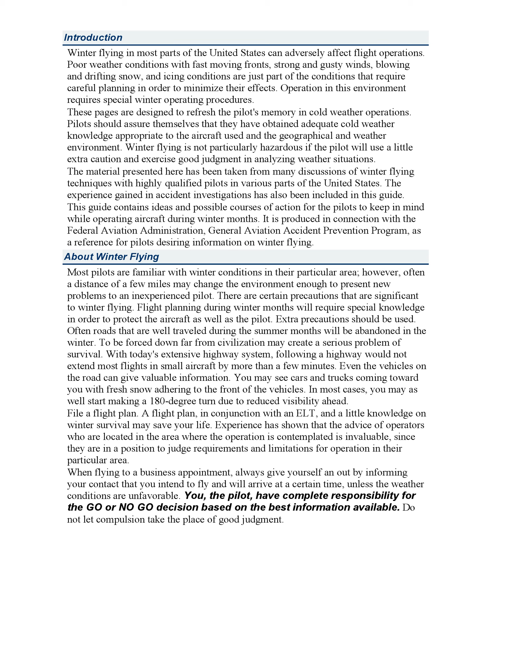Aircraft preparation. If your home base is located in a warm climate area, you may not have familiarized yourself with the aircraft manufacturer's recommendations for winterizing your aircraft. Most mechanical equipment, including aircraft and their components, are designed by manufacturers to operate within certain temperature extremes. Manufacturers generally can predict their product's performance in temperature extremes and outline precautions to be taken to prevent premature failures.

Baffling and winter covers: baffles are recommended by some manufacturers to be used in augmented tubes. Winter fronts and oil cooler covers are also added to some engine installations. FAA approval is required for installation of these unless the aircraft manufacturer has provided the approval. When baffles are installed on aircraft, a cylinder head temperature gauge is recommended, particularly if wide temperature differences are to be encountered.

Engine oil. The oil is extremely important in low temperatures. Check your aircraft manual for proper weight oil to be used in low temperature ranges.

Oil breather. The crankcase breather deserves special consideration in cold weather preparation. A number of engine failures have resulted from a frozen crankcase breather line which caused pressure to build up, sometimes blowing the oil filler cap off or rupturing a case seal, which caused the loss of the oil supply.

The water, which causes the breather line freezing, is a natural byproduct of heating and cooling of engine parts. When the crankcase vapor cools, it condenses in the breather line, subsequently freezing it closed. Special care is recommended during the pre-flight to assure that the breather system is free of ice. If a modification of the system is necessary, be certain that it is an approved change so as to eliminate a possible fire hazard.

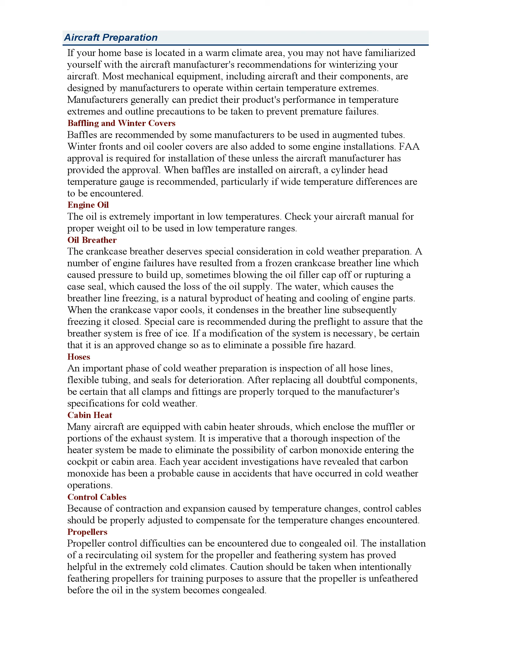Propellers. Propeller control difficulties can be encountered due to congealed oil. The installation of a recirculating oil system for the propeller and feathering system has proved helpful in extremely cold climates. Caution should be taken when intentionally feathering propellers for training purposes to assure that the propeller is unfeathered before the oil in the system becomes congealed.

Batteries. Wet cell batteries require some special consideration during cold weather. It is recommended that they be kept fully charged or removed from the aircraft when parked outside to prevent loss of power caused by cold temperatures and the possibility of freezing.

Wheel wells and wheel pants. During thawing conditions, mud and slush can be thrown into wheel wells during taxiing and takeoff. If frozen during flight, this mud and slush could create landing gear problems. The practice of recycling the gear after a takeoff in this condition should be used as an emergency procedure only. The safest method is to avoid these conditions with retractable gear aircraft. It is recommended that wheel pants installed on fixed gear aircraft be removed to prevent the possibility of frozen substances locking the wheels or brakes.

Operation of aircraft. A thorough pre-flight inspection is important in temperature extremes. It is natural to hurry over the pre-flight of the aircraft and equipment, particularly when the aircraft is outside in the cold. However, this is the time you should do your best pre-flight inspection.

Fuel contamination. Fuel contamination is always a possibility in cold climates. Modern fuel pumping facilities are generally equipped with good filtration equipment, and the oil companies attempt to deliver pure fuel to your aircraft. However, even with the best of fuel and precautions, if your aircraft has been warm and then is parked with half-empty tanks in the cold, the possibility of condensation of water in the tanks exists.

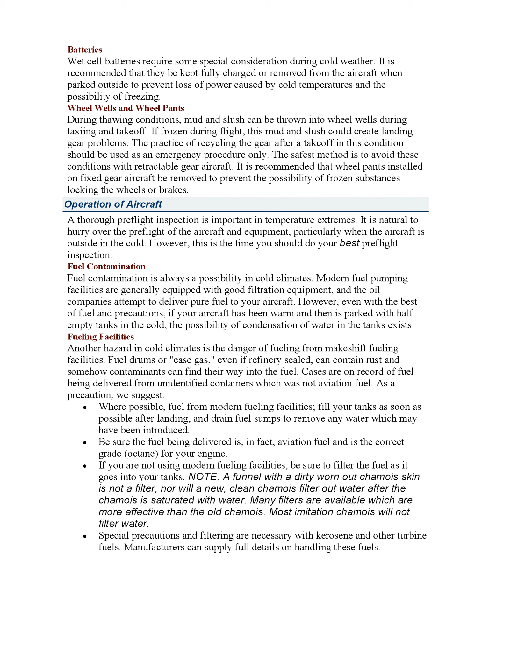Note, a funnel with a dirty worn-out chamois skin is not a filter, nor will a new clean chamois filter out water after the chamois is saturated with water. Many filters are available which are more effective than the old chamois. Most imitation chamois will not filter water. Special precautions and filtering are necessary with kerosene and other turbine fuels. Manufacturers can supply full details on handling these fuels.

Fuel filters and sumps, including each tank sump, should be equipped with quick drains. Sufficient fuel should be drawn off into a transparent container to see if the fuel is free of contaminants. Experienced operators place the aircraft in level flight position, and the fuel is allowed to settle before sumps and filters are drained. All fuel sumps on the aircraft are drained, including individual tank sumps.

Extra care should be taken during changes in temperature, particularly when it nears the freezing level. Ice may be in the tanks which may turn to water when the temperature rises, and may filter down into the carburetor, causing engine failure. During freeze-up in the fall, water can freeze in lines and filters, causing stoppage. If fuel does not drain freely from sumps, this would indicate a line or sump is obstructed by sediment or ice. There are approved anti-ice additives that may be used.

Where aircraft fuel tanks do not have quick drains installed, it is advisable to drain a substantial amount, one quart or more, of fuel from the gascolator, then change the selector valve and allow the fuel to drain from the other tank. Advisory Circular AC 20-43C, Aircraft Fuel Control, contains excellent information on fuel contamination. Paragraphs 10 and 11 are especially pertinent to many light aircraft and include a recommendation for periodic flushing of the carburetor bowl.

Aircraft preheat. Low temperatures can change the viscosity of engine oil, batteries can lose a high percentage of their effectiveness, instruments can stick, and warning lights, when pushed to test, can stick in the pushed position.

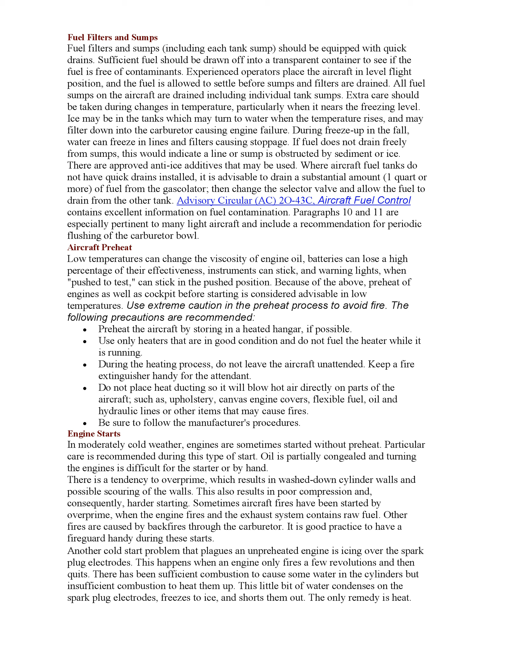The only remedy is heat. When no large heat source is available, the plugs are removed from the engine and heated to the point where no more moisture is present.

Engines can quit during prolonged idling because sufficient heat is not produced to keep the plugs from fouling out. Engines which quit under these circumstances are frequently found to have iced over plugs. After the engine starts, use of carburetor heat may assist in fuel vaporization until the engine obtains sufficient heat.

Radios. Radios should not be turned on prior to starting. Radios should be turned on after the aircraft electrical power is stabilized, be allowed to warm up for a few minutes, and then be tuned to the desired frequency.

Ice, snow, and frost. A common winter accident is trying to take off with frost on the wing surface. It is recommended that all frost, snow, and ice be removed before attempting flight. It is best to place the aircraft in a heated hangar.

If so, make sure the water does not run into the control surface hinges or crevices and freeze when the aircraft is taken outside. Don't count on the snow blowing off on the takeoff roll. There is often frost adhering to the wing surface below the snow. Alcohol or one of the ice removal compounds can be used.

Caution should be used if an aircraft is taken from a heated hangar and allowed to sit outside for an extended length of time when it is snowing. The falling snow may melt on contact with the aircraft surfaces and then refreeze. It may look like freshly fallen snow, but it usually will not blow away when the aircraft takes off.

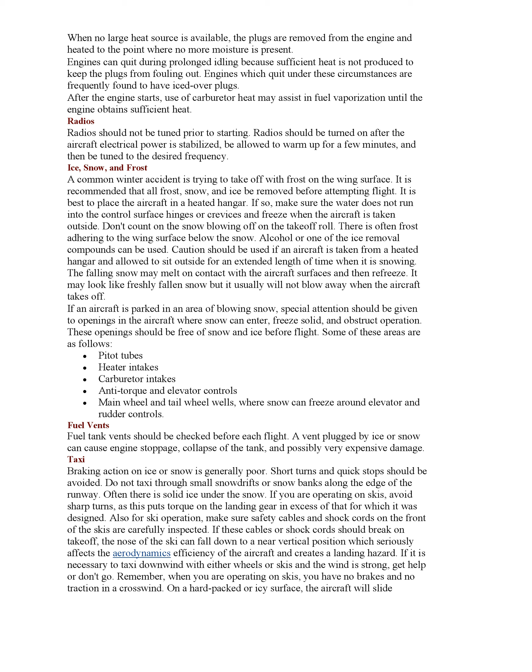On a hard-packed or icy surface, the aircraft will slide sideways in a crosswind and directional control is minimal, particularly during taxiing and landing roll when the control surfaces are ineffective.

Takeoff. Takeoffs in cold weather offer some distinct advantages, but they also offer some special problems. A few points to remember are as follows.

Do not overboost supercharged engines. This is easy to do because at very low density altitude, the engine thinks it is operating as much as 8,000 feet below sea level in certain situations.

Care should be exercised in operating normally aspirated engines. Power output increases at about 1% for each 10 degrees of temperature below that of standard air. At -40°F, an engine will develop 10% more than rated power even though RPM and MP limits are not exceeded.

If the temperature rises, do not expect the same performance from your aircraft as when it was operated at the lower density altitudes of cold weather.

Use carburetor heat as required. In some cases, it is necessary to use heat to vaporize the fuel. Gasoline does not vaporize readily at very cold temperatures.

Do not use carburetor heat in such a manner that it raises the mixture temperature barely to freezing or just a little below. In such cases, it may be inducing carburetor icing. An accurate mixture temperature gauge is a good investment for cold weather operation.

It may be best to use carburetor heat on takeoff in very cold weather in extreme cases.

If your aircraft is equipped with a heated pitot tube, turn it on prior to takeoff. It is wise to anticipate the loss of an airspeed indicator or most any other instrument during a cold weather takeoff, especially if the cabin section has not been preheated.

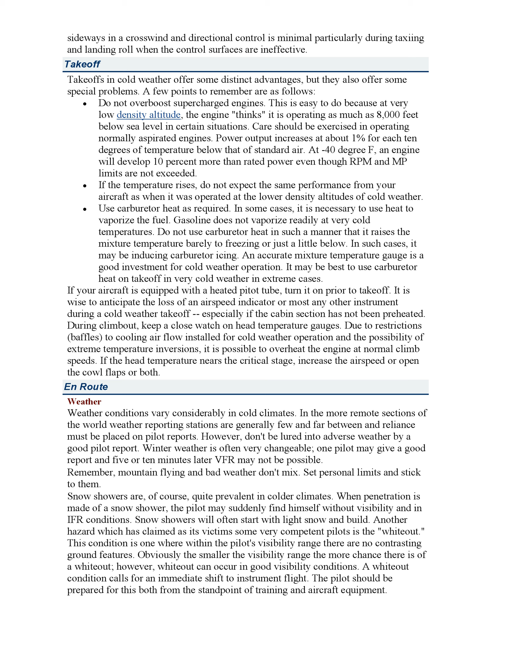A whiteout condition calls for an immediate shift to instrument flight. The pilot should be prepared for this both from the standpoint of training and aircraft equipment.

Carburetor ice. Three categories of carburetor ice are: impact ice, formed by impact of moist air at temperatures between 15 and 32 degrees Fahrenheit on air scoops, throttle plates, heat valves, etc.

Impact ice usually forms when visible moisture such as rain, snow, sleet, or clouds are present. Most rapid accumulation can be anticipated at 25 degrees Fahrenheit.

Fuel ice forms at and downstream of the point where fuel is introduced, and occurs when the moisture content of the air freezes as a result of the cooling caused by vaporization.

Fuel ice generally occurs between 40 and 80 degrees Fahrenheit, but may occur at even higher temperatures. It can occur whenever the relative humidity is more than 50%.

Throttle ice forms at or near a partly closed throttle valve. The water vapor in the induction air condenses and freezes due to the Venturi effect, cooling as the air passes the throttle valve.

Since the temperature drop is usually around 5 degrees Fahrenheit, the best temperatures for forming throttle ice would be 32 to 37 degrees Fahrenheit, although a combination of fuel and throttle ice could occur at higher ambient temperatures. In general, carburetor ice will form in temperatures between 32 and 50 degrees Fahrenheit when the relative humidity is 50% or more.

If visible moisture is present, it will form at temperatures between 15 and 32 degrees Fahrenheit. A carburetor air temperature (CAT) gauge is extremely helpful to keep the temperatures within the carburetor in the proper range. Partial carburetor heat is not recommended if a CAT gauge is not installed.

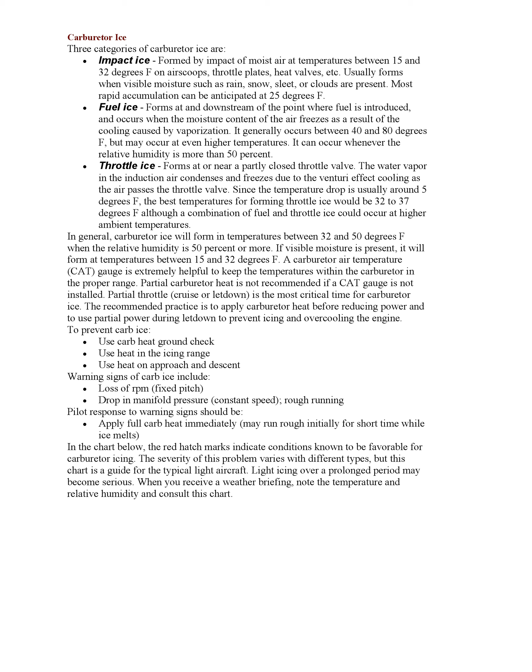In the chart below, the red hatch marks indicate conditions known to be favorable for carburetor icing. The severity of this problem varies with different aircraft types, but this chart is a guide for the typical light aircraft. Light icing over a prolonged period may become serious. When you receive a weather briefing, note the temperature and relative humidity and consult this chart.

Carbon monoxide poisoning: don't count on symptoms of carbon monoxide to warn you. It's colorless, odorless, and tasteless, although it is usually found with exhaust gases and fumes. If you smell fumes or feel any of the following symptoms, you should assume that carbon monoxide is present. Initial symptoms include feelings of sluggishness, warmth, and tightness across the forehead, followed by headache, throbbing pressure at the temples, and ringing in the ears. Severe headache, nausea, dizziness, and dimming of vision may follow.

If any of the above conditions exist, take the following precautions: shut off the cabin heater or any other opening to the engine compartment, open a fresh air source immediately, don't smoke, use 100% oxygen if available, land as soon as possible, and be sure the source of the contamination is corrected before further flight.

Spatial disorientation can also be expected anytime the pilot continues VFR flight into adverse weather conditions. Flying low over an open body of water during low visibility and a ragged ceiling is another ideal situation for disorientation.

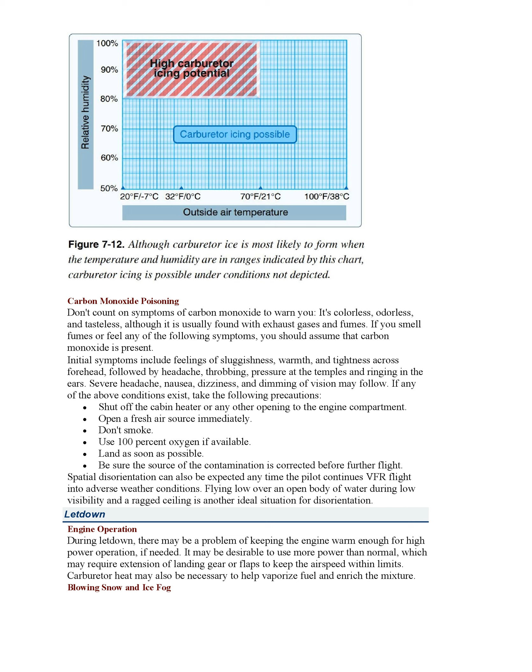Letdown, engine operation: during letdown, there may be a problem of keeping the engine warm enough for high power operation, if needed. It may be desirable to use more power than normal, which may require extension of landing gear or flaps to keep the airspeed within limits. Carburetor heat may also be necessary to help vaporize fuel and enrich the mixture.

Blowing snow and ice fog. Blowing snow can be a hazard on landing, and a close check should be maintained throughout the flight as to the weather at destination. If the weather pattern indicates rising winds, then blowing snow may be expected, which may necessitate an alternate course of action.

Ice fog is a condition opposite to blowing snow and can be expected in calm conditions about -30 degrees Fahrenheit and below. It is found close to populated areas, since a necessary element in its formation is hydrocarbon nuclei such as found in automobile exhaust gas or the gas from smokestacks.

Both of the conditions described above can form very rapidly and are only a few feet thick, usually no more than 50 feet, and may be associated with clear en route weather. Pilots should always make a careful check of the current and forecast weather, as well as make a pre-flight plan for alternate courses of action.

Landing: a landing surface can be very treacherous in cold weather operations. In addition, caution is advised regarding other hazards such as snow banks on the sides of the runways and poorly marked runways. Advance information about the current conditions of the runway surface should be obtained. If it is not readily available, take the time to circle the field before landing to look for drifts or other obstacles.

Be aware that tracks in the snow on a runway do not ensure safe landing conditions. Often snowmobiles will use runway areas and give a pilot the illusion that aircraft have used the airport and the snow is not deep. Ski-wheel combinations are popular and very convenient, however, forgetting to use the landing gear appropriate to the runway surface can be embarrassing.

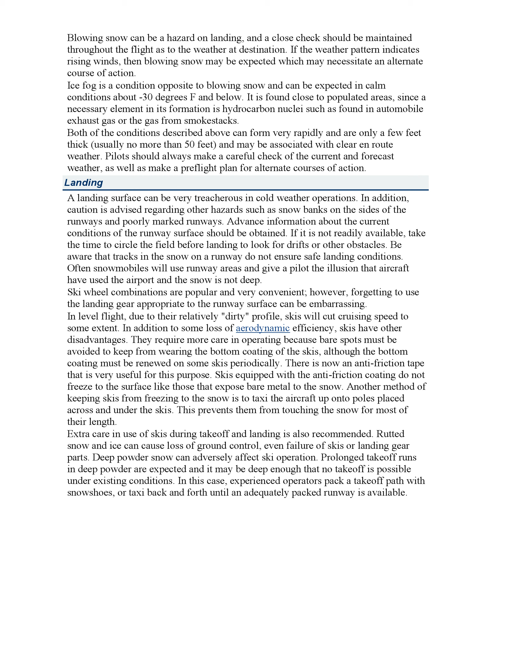In this case, experienced operators pack a takeoff path with snowshoes, or taxi back and forth until an adequately packed runway is available. Post-flight: the following are items to consider before leaving the aircraft after the flight.

As soon as possible, fill the tanks with the proper grade of aviation fuel, even if the aircraft is going into a heated hangar.

If the aircraft is to be left outside, put on engine covers and pitot covers. If the weather forecast is for snow or clear and colder, put on rotor or wing covers and save yourself from a snow or frost removal job in the morning. Control locks or tied controls are suggested if the aircraft is left outside and there is a chance of high wind conditions.

If the aircraft is equipped with an oil dilution system, consider the advisability of dilution of the engine oil. If it is decided to dilute, manufacturer's recommendations should be carefully followed, commensurate with the temperature expected. During engine shutdown, a good practice is to turn off the fuel and run the carburetor dry. This diminishes the hazard of a fire during preheat the next morning.

Survival. After a crash landing, it is best to leave the aircraft as soon as possible. Take time to analyze the situation and help others. Take care of any injuries first. Stay away from the aircraft until all gasoline fumes are gone.

Sit down and think. Keep in mind that survival is 80% mental, 10% equipment, and 10% skills. Since mental factors are the number one problem, establish a goal to conquer regardless of the consequences. Don't have give-up-itis or a do-nothing attitude. Don't run off without taking time to think out each problem. Don't imagine things that are not there.

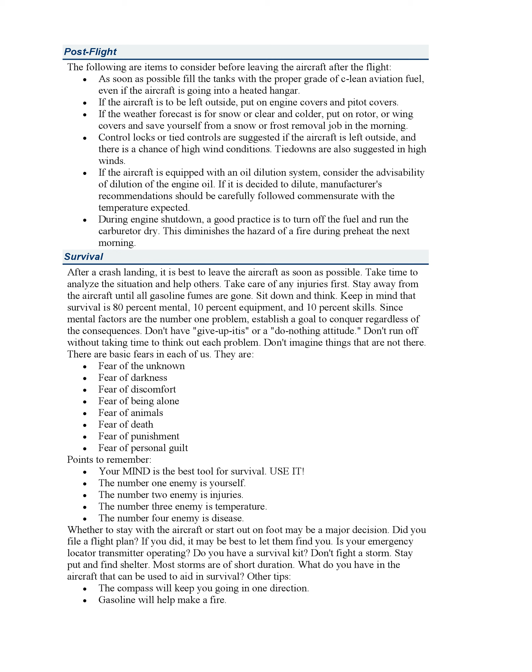Other tips: the compass will keep you going in one direction. Gasoline will help make a fire. Oil can be used for smoke signals. Seat upholstery may be used to wrap around feet or hands. Wiring may be used for tie strings. The battery may be used to ignite fuel.

Use whatever is available to protect the body from the loss of heat. Don't waste body heat by eating snow; make a fire and heat water before drinking. You can conserve energy to last three weeks if you have water and stay dry. Body heat can escape 240 times faster from wet clothing than from dry clothing. It is best to eat small amounts of sugary foods to replace the energy lost through body heat.

A good survival kit is well worth its weight. The following would be a useful kit; however, you can assemble an inexpensive survival kit of your own. First, you need a metal container with a lid. This container can be used to heat water, make tea, use as a digging tool, or polish as a signal mirror.

In addition, you need a Boy Scout knife, small candle, box of matches wrapped in plastic, a leaf bag - pull over head, cut hole for face - a garbage bag, step in, pull up and tuck in pants or tie around waist. You now have body protection from heat loss. Sugar cubes, wrapped in plastic, 6 to 12 cubes.

Plastic tape. The list above is only a sample of what can be done. Use your own innovation and remember that survival depends upon you.